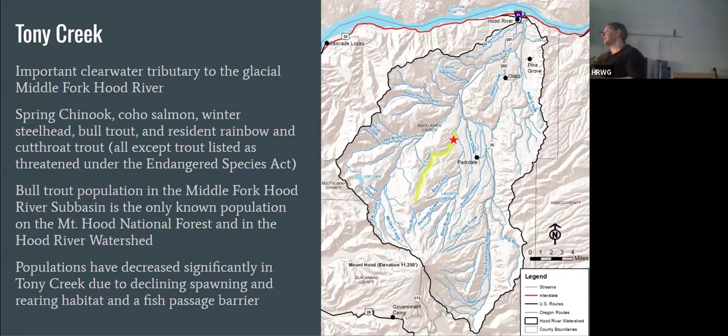But the two biggest are the impacts of logging in the watershed and a couple of fish passage barriers. So I wanted to show you this picture. Does anybody know where this is? This is, if you were coming down the highway to the north, this here is the flat. Generally, this area above here is where the Middle and East Fork confluence is. This is generally referred to as the East Fork until it hits the confluence of the West Fork down below. This is the dam here. This was the Oregon Lumber Company land. This dam here was in place for about 41 years.

It was a pretty major fish passage barrier during its lifespan to everything above on the Middle Fork and East Fork. A lot of the lumber that came through this mill largely came from the West Fork watershed, but because of the railroad that ran very close to Tony Creek, the vast majority of Tony Creek was logged and brought through this mill. So there's a long history of impact from logging on Tony Creek that had erosion consequences. There was historically a large amount of large wood naturally forming in the watershed that created a lot of great habitat, but a lot of that had since come through in the logging operations and had a pretty significant impact on the fish species there.

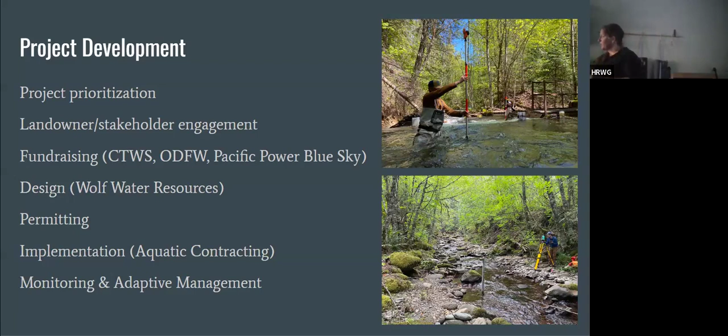We hired Steve and Liz with Wolf Water Resources to help us develop the design and the engineering for the project. There's an enormous, really fun amount of permitting we go through for these projects. And then we hire a contractor to implement Steve's design. And then we go into sort of a monitoring and adaptive management phase to make sure that the work we do is doing what we wanted it to do, and we adapt if we need to.

So this is our existing site. Steve's gonna walk you through the exciting technical stuff.

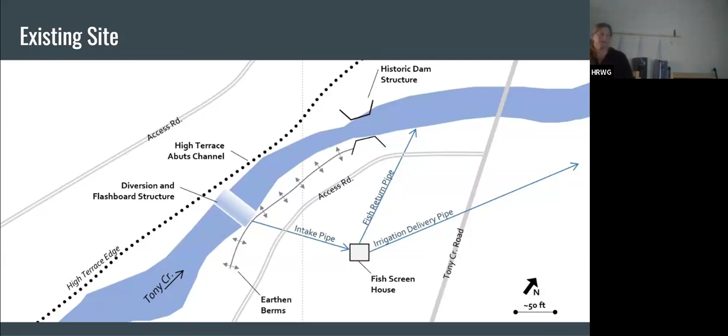Hi everybody, Steve, the design engineer. Just before I dive into this, I really want to acknowledge thanks to the Hood River Watershed Group, Alex, especially Cindy, and then also some of my colleagues that helped do this design - did a lot of the heavy lifting, like Liz, who's in the audience, but some others at my office, like Lucas Evans, as well as Curtis Loeb.

Anyways, this was a really interesting project. Just a little background - this is the existing site. You can see Tony Creek running from left to right here, and you have that dam, as well as downstream you have some historic features, like a historic dam, as well as Tony Creek Road, which really locks in the site. And then you have a very high terrace on the left. I don't know who's familiar with the site, but before construction it was also locked in by another big earthen berm on the right-hand side as well, and then a lot of diversion infrastructure in the floodplain to the sides.

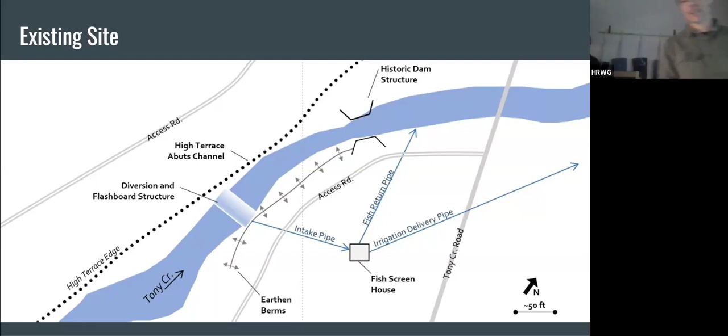And to kind of get a sense of what some of that looked like - obviously the diversion, the intake as well, the infrastructure in the floodplain, the bridge downstream, and some of the old concrete remnants in the floodplain.

So it's full of constraints. The site had a lot. The biggest one, obviously, was the diversion structure itself. And from the start, the direction was we couldn't touch it, essentially. We couldn't do anything that our project could extend into its footprint. We couldn't affect its operations or anything like that.

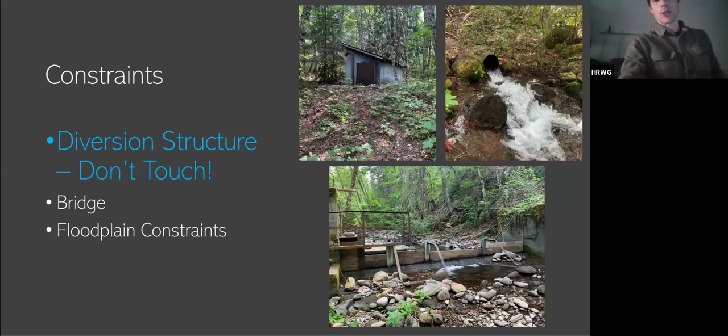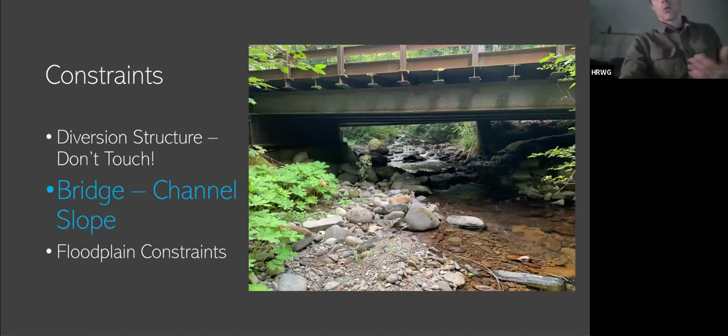And then the bridge downstream - it was only about 300 feet from the bridge to the diversion structure, so it's a very short reach. And within that, we couldn't really affect the profile of the stream itself. And there's not a lot of room in the floodplain because it has a high terrace on the left, it's got infrastructure on the right. So we couldn't change the alignment of it, lengthen it in any way. So we're really locked into this site - it's really constrained.

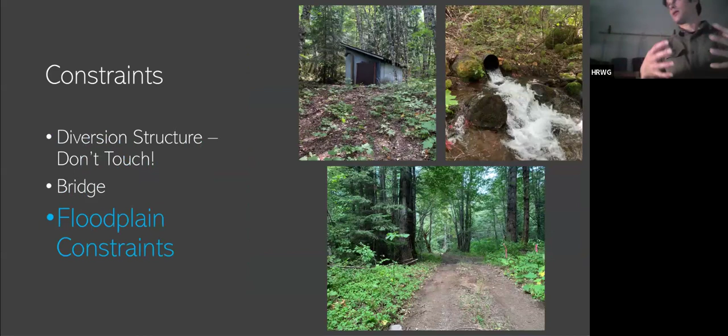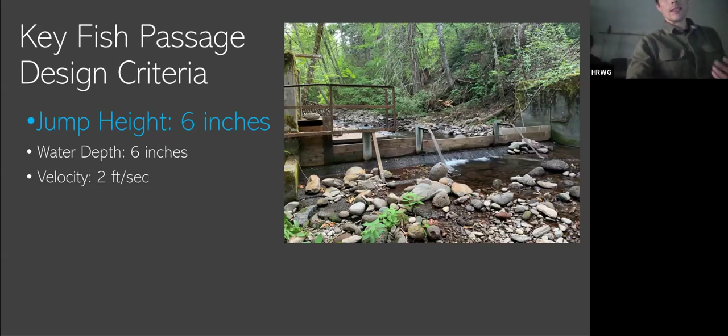With our design objectives, we have to design a project that meets fish passage criteria. Some of the basics are we have to achieve jump heights for fish, and maintain water depths at various flows. As flows get really low, especially when they divert more than half the base flows, we're left with only about 1 CFS in the channel itself. Additionally at high flows, we need to lower the velocities. It's a really steep reach, really narrow, coming with a lot of energy, and the narrower and steeper it is, the faster the velocity. We need to slow that down somehow and let fish get up the stream.

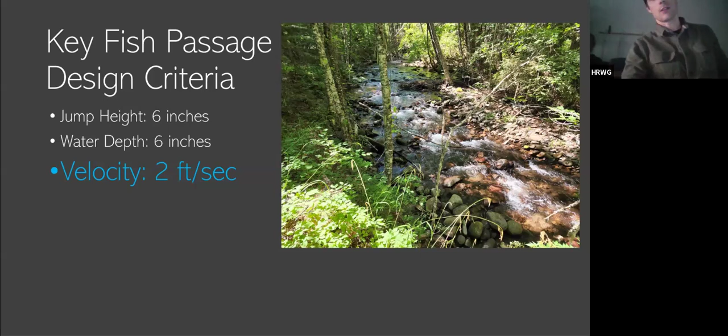Since we're running short on time, I'm going to skip slides that have numbers in them, since you're probably not interested. But basically, with the fish passage...

We also have design flows essentially. It's between a certain range of flows, basically above flows that happen more than 95% of the year. So 95% of 365 days of the year, flows above that we need to maintain fish passage, but then also 5% on the upper range. So there's a wide range of flows we're trying to meet.

Also with the diversion structure, when we start getting into design, it's like, what are we trying to do? We're trying to get fish past this structure here. And as you can see, they can't really make it.

This is in a low flow condition, and flow is actually going under those boards. To get a sense, they've got to get over that somehow - they can't really get through the little slot in between. For your reference, if you haven't been out there, that's about a 2.5 to 3 foot jump, and the little fish can't do it.

And we're trying to meet a 6-inch criteria. So we've got a lot of ground to make up. So how are we going to do that?

Essentially, this is what it's looking like. There's a big board in the way and flow going under it, and fish can't jump over that. Somehow, either you can go around it or maybe you can go over it. And this is kind of what we're trying to achieve.

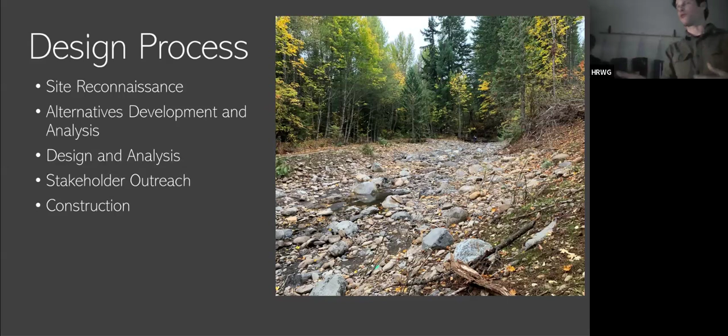I got to participate in a handful of those opportunities, but I know there was a lot going on in the background all throughout, before we even got involved and all through when we were there. And it's a very important part of these projects.

But then we developed some alternatives. The first two, like a roughened channel and cascade pool, very similar, basically the same. Cascade pool is just a little steeper and includes some resting pools in there. A step pool, that's basically just a series of steps that don't exceed that maximum jump height, essentially, to make the grade up. And then a side channel, that's literally going around the diversion. But since that would then require taking flow away from the diversion, that affects its operations, or would be perceived to, so that was kind of ruled out.

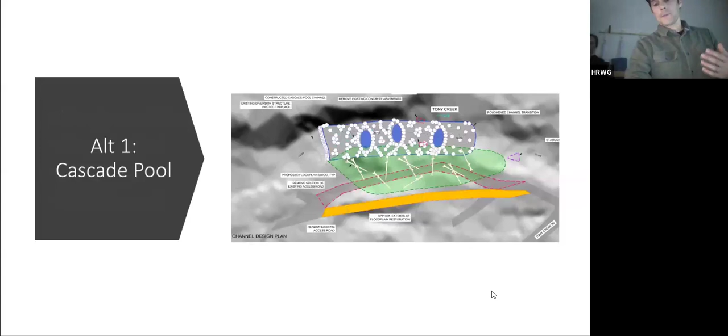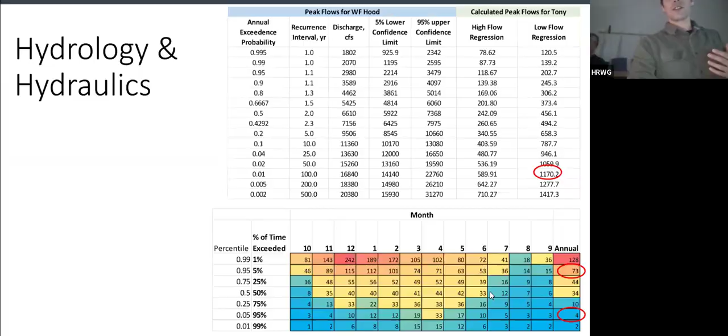And some of the simple graphics of those, like a cascade pool, I didn't change the slides, so we're going to skip through them. But basically, the preferred alternative was that cascade pool morphology, and the reasons why: one, it provided that fish passage, and two, for the conditions of the site, the slope and stuff, it was actually something that you could expect to see in a natural environment. And three, it's deformable, so to speak, as it can withstand some change.

The beds change over time in streams, and so you can expect to see rocks move around a little bit, but it still functions with a little bit of modification, as opposed to something that's very rigid in its design, like a step pool that requires specific geometries, that if a rock comes out of place, you might not achieve the fish passage criteria, and then it can't handle that change. So those were some of the reasons.

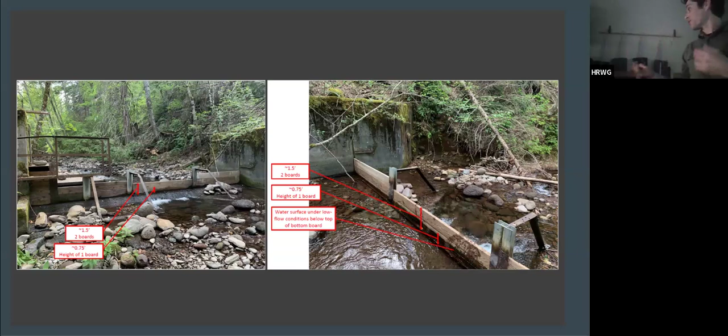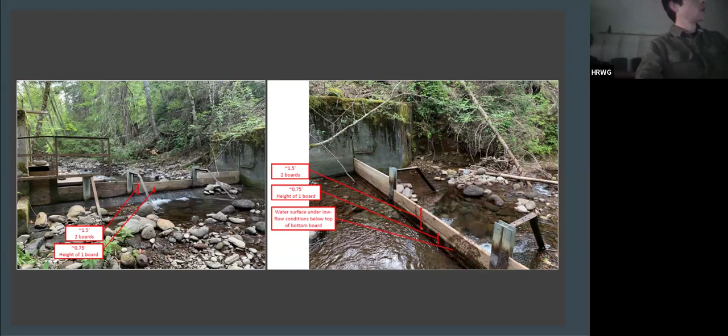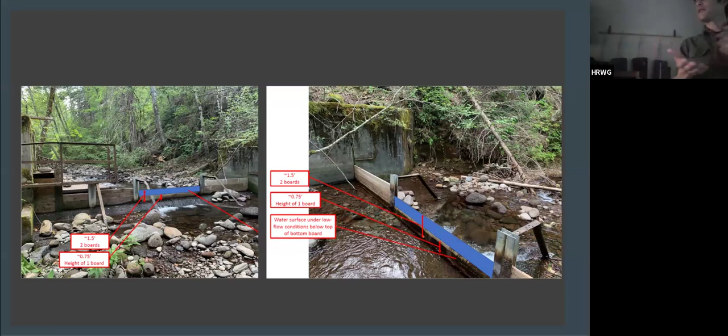And we had to show to ODFW that we couldn't meet all the requirements. But once we were able to show them that, we were able to bring it down a little bit and meet somewhere in the middle and come up with something where we could get it close. And then maybe we could work with the diversion owner and ideally come up with a scenario where they don't really need that board on top and say, can we lower that board? And so through discussions that Alix was having with the diversion owner, we kind of met in the middle, we brought the creek up, and they were open to bringing the boards down. And then we were able to meet the jump heights. So that was one key component of the design.

Another key component was the channel design itself. Because once we come up with, all right, we need to bring the channel up this high, now we've got to design this channel that's going to handle all this flow and not wash out like the existing channel has already. So we need it to be resilient to peak flows. We need it to, to the greatest extent possible, minimize that stream power, because the existing conditions were super narrow coming out of this creek.

So it was basically like a fire hose and it washed out all the bed material. And natural creeks tend to replenish themselves, but there's too much energy washing all the bed material out, and the dam itself was actually retaining all the sediment coming from upstream. So it was just getting washed down to this hard pan, this very clay layer. And so none of the rock was sticking around.

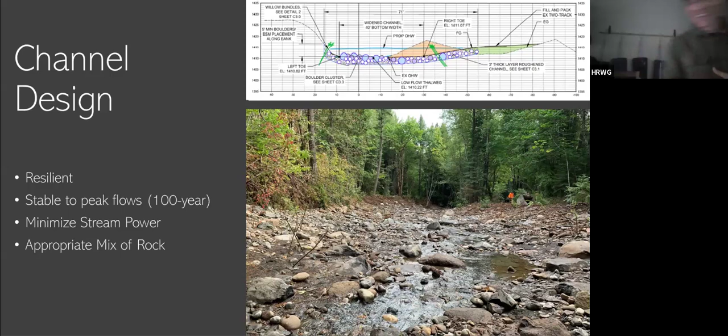So with that, we made a decision that the bed needs to be very resilient. And we're designing, putting oversized rock so that it can withstand flows up to the 100-year event. We don't want it to go away. And with that, I'm not going to show you many equations, okay?

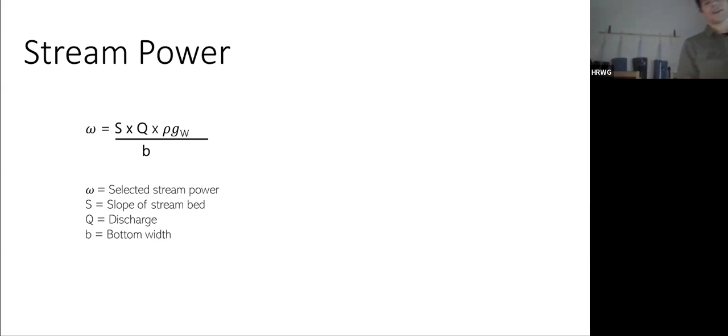But good point. So basically, we can measure with some hydraulic variables the power of the creek to erode the stream bed. And rather than look at the equation itself, look at the specific variables. The things that go into it are the channel slope, which we don't really have much control of because we're so confined. And if anything, we're raising it to kind of meet the diversion.

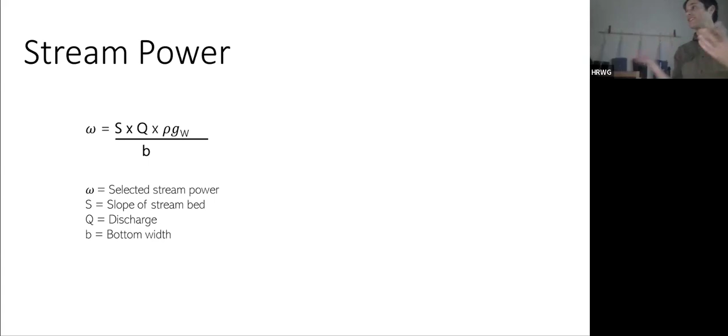The discharge of the creek, or the flow. We're not Mother Nature. She's dictating this. But then also the one on the bottom is the channel width. And that is actually something we can do something about. And for all you math whizzes out there, it's the denominator. So if we widen it, we make it bigger, it actually reduces the stream power.

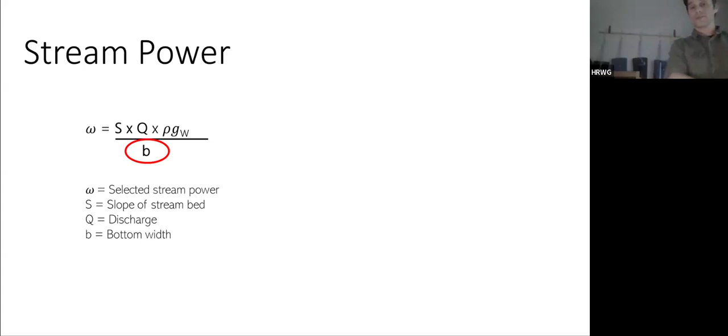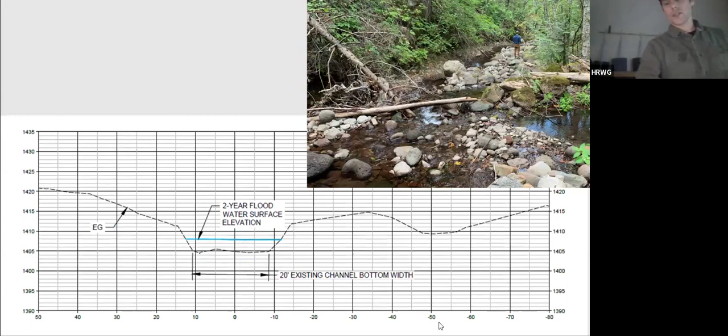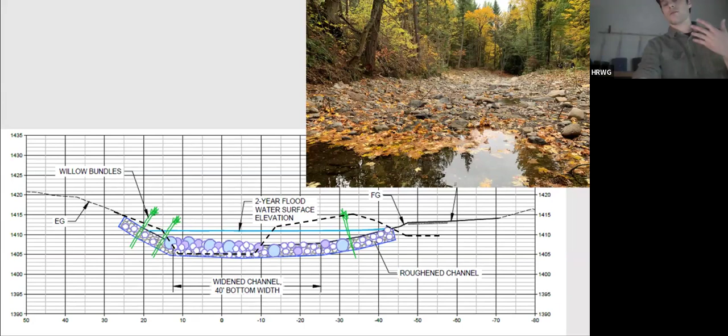So like I was saying before, on the right-hand side, there's this big mound that's confining the channel, and it's leaving just this 20-foot channel under pre-project conditions. Well, what if we remove that and we widen this channel? And so that was our plan. We could essentially double the width of this channel and greatly reduce the power of this creek and increase the likelihood that what we put in there is going to stick around, reduce the forces that are acting on our proposed channel. And so that's what our design intended to do, and ended up with something like this instead.

And what's that? Not so much. I don't know if we see much spawning. It's more just reducing the amount of power in here, because the fish definitely need spawning habitat. That's upstream, because we want them to get there. But before this project, they couldn't swim through this because it was just a fire hose. It would just flush them right out. Or not enough water.

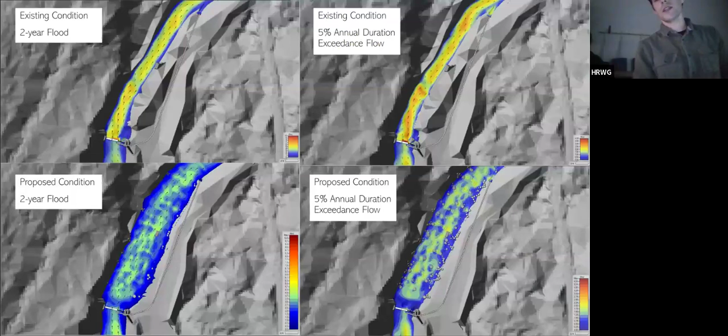And to kind of see it, and this is where I get excited, this is the model and the output. Don't look too closely, but see the colors more or less. On the top two are existing conditions, and on the bottom are post-project conditions, and a couple different design flows that we did. You see a lot more of the reds and yellows and oranges, as those are the higher velocities and higher powers.

Not to mention on the top, it's a much narrower stream of water that's running down. But then on the bottom, it's a lot more cooler colors, the blues and the lighter blues. And that means we've really reduced the velocities. And as you can see, we've made it a much wider wetted channel and just spread the water out, spread the energy out.

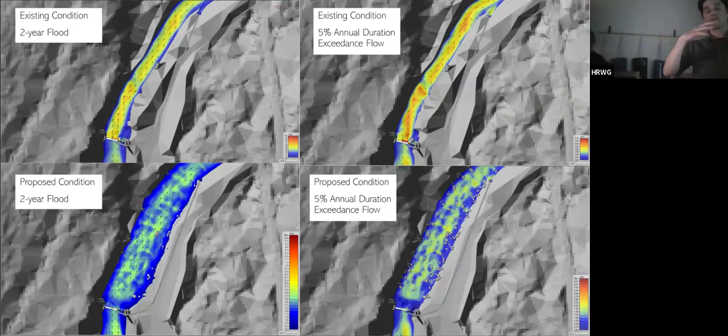And especially on the right, that's a lower flow, but you can see these little circles in there. Those are large boulders that we also are incorporating that are above the water surface and create shadows and slow water areas, basically creating those slow water paths that can get up to the dam and then cross over.

And so that's what went into the design, and finally we put all the detail into it so that a contractor could bid on it and build it. I tried to keep it short. So, right? Gotta help me walk through this part too. So I guess I could lead into that.

So after we did all that, we put together basically design drawings. We put the details together on how to construct what we were trying to achieve: how you build a channel, how you put all the rocks in, the step-by-step process of constructing the channel, like over-excavating, to the dimensions and the elevations that we needed in order to achieve that objective. Yeah, and then they went out and built it this summer.

You can see these projects are really engineered, which is what we have to do in some of these stream reaches, like Baldwin Creek, where there's infrastructure, where there's FEMA floodplain mapping, so that we can get these projects permitted and put them in the ground.

So the enormous amount of work that goes into the design and engineering is clearly a critical part of this project, or these projects. But we're just gonna show you a lot of pretty pictures of the process of the construction. This is before, so this is looking up at the dam, and then this is pretty much at the bottom of the reach looking up. And this is clearly at low flow, so you can imagine.

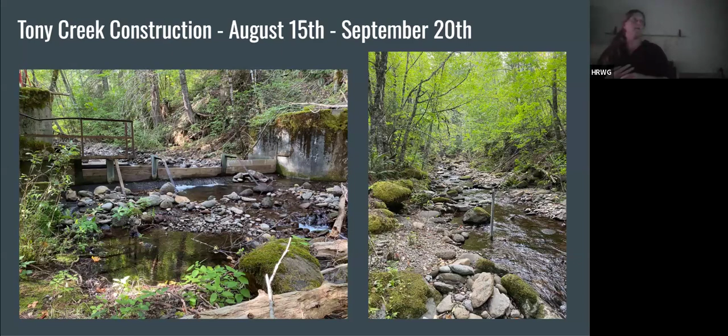So we constructed this project between August 15th and September 20th last year, so a decent amount of time. We hired Aquatic Contracting to do this project. Let's see. They're amazing, yeah, amazing contractor.

Challenge with construction is it's a very unique situation. There's a lot of on the water. You're always dealing with water. There's a lot of sensitive habitats, and just a qualified contractor that's done this work before and knows what they're doing just makes a world of difference in project success. And they were really wonderful

The first thing we do, particularly in this reach, we were able to divert the entire project reach through to the diversion to maintain downstream passage for fish that were in the creek. So then we basically dewatered the entire 300 reach that we were constructing. And then ODFW comes in, and some key volunteers like Alexis, the new FID manager. And we salvage all the fish and other aquatic wildlife species that are in that reach before we construct.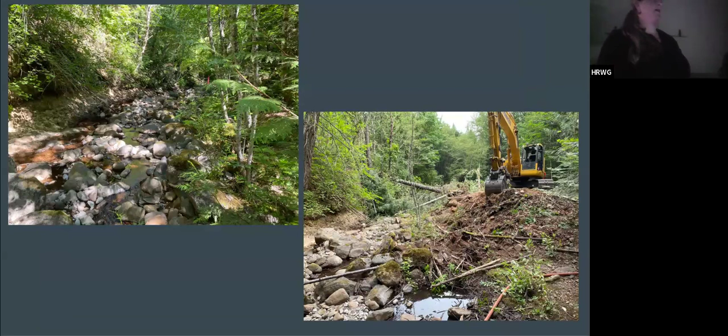This is this berm that Steve has been talking about. You can see the creek is on the other side here, but it was a man-made feature on the landscape that really confined the reach. And so one of the first things we did was take that out with a big excavator. A lot of that soil that was on site we used to raise the road, the access road.

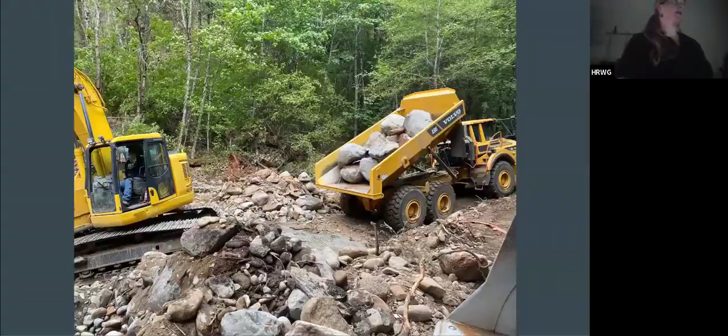And this is sort of in process. You can see how much big rock material was in there. We were able to reuse that all in the construction of the creek itself. You can see how it's changing. We brought in upwards of 1,700 tons of rock in a range of sizes. These very big 4 to 6 foot boulders, some even bigger.

A mix that we had created for us, an engineered stream bed mix that had a varied amount of cobbles and small boulders, and Steve put a lot of time into creating the exact specifications for that mix. And then we had a whole bunch of sand, and we'll get to that in a minute. This is Steve's schematic of what it should look like when it's constructed.

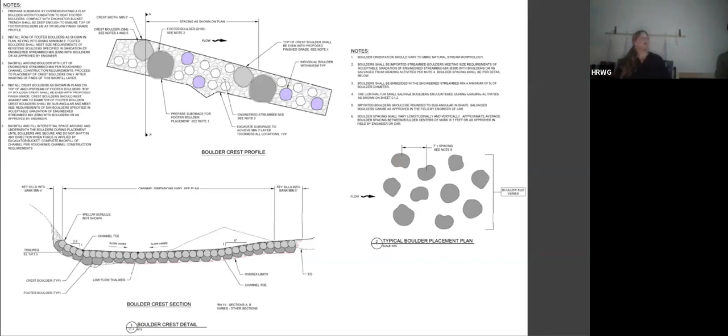Yeah, so I mixed in a couple plan set details in here because we have constructed photos. So basically we had to develop these construction details, how to build different features. Some of the elements we did were the grade controls or boulder crests that kind of set those grades, and then the actual step-by-step sequencing of building the channel, and then also create the resting pools in that cascade pool formation by putting in these big boulder clusters that would basically create small backwater areas and pool areas within the channel, and then it would meander through.

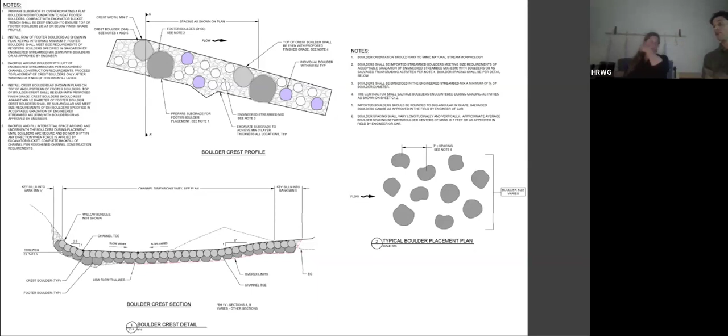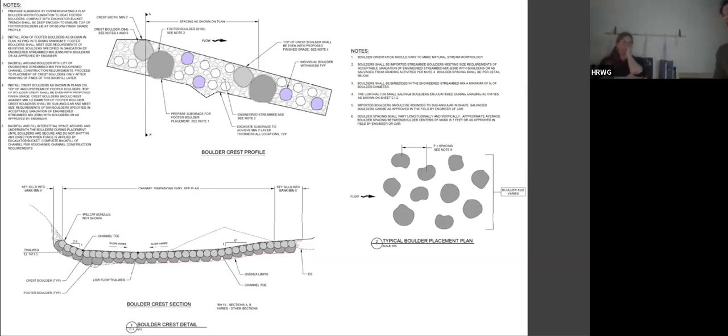So to get a sense, and this also emphasizes how important it is to have a good contractor, they need to be able to look at these cartoon drawings that Liz and I developed. Yeah, you're not off the hook. And then they need to interpret this and build it in the field. So when you look at something like this, it's actually looking like this in the field. And then after they backfill it, you're just like, wait, where did they go? But it's in there.

Yeah. And it's really in there to lock in that grade material. The grade is set down below the grade of the finished stream bed. So those 4 to 6 foot boulders, this big, as the contractor called it after a while, frowny face across the bed, because he loved it so much. That's underneath the bed, and then they're filled in with all this other mixture of rock. Like the foundation. It's the foundation. Yeah. And there were 4 of those throughout the 300 feet.

And they sort of set the grade, and they're pretty bombproof, so that if there's shifting in the creek over time, which we expect there might be, that really holds the grade so that the creek isn't going to head cut up and take out the very precisely constructed stream bed.

Was there any bedrock at all? In one challenging section, you saw in this picture here, we were constantly checking grade and making sure that those rocks were placed right where Steve wanted them, so that we could conform to the design. But just downstream from this spot, we hit some pretty hard pan rock, and what we ended up doing is chipping it out with the excavator.

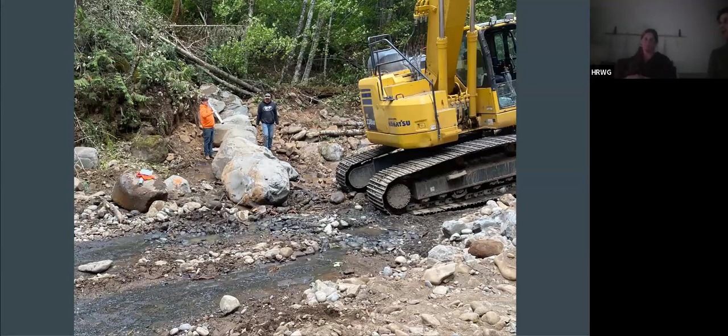So we hit that point. Yeah, it wasn't quite bedrock. It was more like a really hardened clay. So yeah, they were able to chip it out. There are always exciting unforeseen challenges as you're constructing. In order to build this channel, it's not just dig a hole and then put it in. It's a series of steps to make sure it goes in well and comes together solidly in a form that won't just unravel.

So you have to over excavate it. Then you have to start putting stuff in the margins, and then you're going to put a bunch of boulders in, and because the site's so small and the material is so big, you can't just bring in a rolling compaction like you would when designing a road. You have to put it together meticulously and wash things in. So you put in boulders, backfill with the rest of the mix, and do that in a series of lifts so that you get everything washed in and bring in the fines.

So with large rock, when you put it all together, you've seen squirrels go crawling into those voids. There's a lot of open space even within that mix. You can't have that. If that's left there, it's much more likely to just unravel when the river hits it. So you have to fill all of that in. And that's where you're literally with a hose and buckets of sand, washing it in. So you put in a lot of boulders, and then you put in more rock.

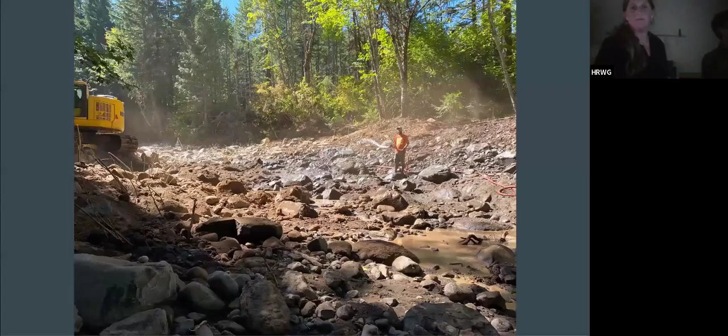And Alex and Eric, I took a turn on it. You're just holding the hose. We spent many hours just washing the fines, taking basically a fire hose and washing in, and it's actually really therapeutic. Yeah, it is. Really addicted to it. When they wouldn't let me do it, I was actually a little shaky. You just wash those fines in to fill in those voids and to seal the bed. And if the water just infiltrated, I'd be like, you haven't done enough, keep doing more. So basically, it has to retain standing water.

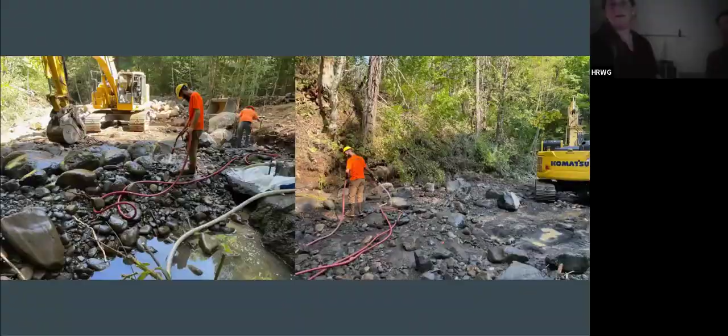And going back to how much flow we have, when you're only left with maybe a single CFS in the creek at low flows, it's really important to make sure that water stays on the surface. And the little bit of water that was coming through the subsurface, we just pumped that back in and used it for this washing in.

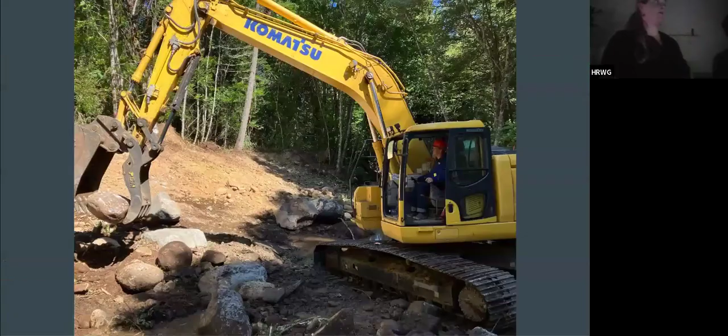You can see what it looks like once you get all of the sand. The excavator would sprinkle the sand over the top, and we'd wash it in, then sprinkle the sand over the top and wash it in, and then do another level. So lots of hose moving around the site. I did want to point out that I got to place that rock in the excavator, that one rock.

Well, I didn't get... You didn't have to sign off on that one. You do that. Yeah, so this is just working down.

You can see the over-excavation below, before you start placing the rocks.

Another really important part is that Chuck and another volunteer harvested about 500 to 600 stakes, willow and dogwood stakes. Throughout the project, as we were constructing, the excavator would come in, stick the tines of the bucket in and pull back, and we'd shove a bunch of these stakes in. You can see that right off the bat we made sure they were hitting the water before we sealed it back up and washed it back in.

So as we went, we put a bunch of natural roughness in on the bank. We were just out there today, and they're looking really well.

This is sort of what it started to look like at the end. You can see our goal was to hit water level at the concrete sill of the dam, which it was doing. In the previous pictures you can see the concrete sill down here, up to the top of the sill.

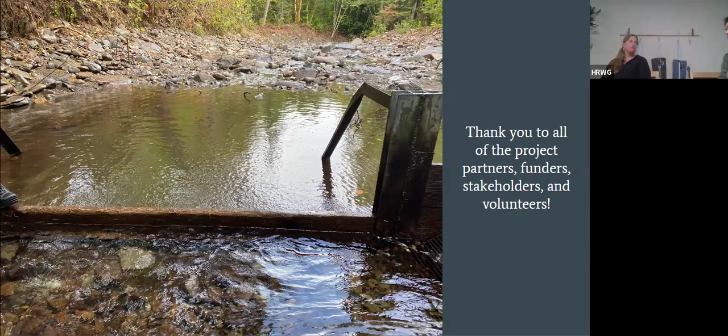But the range of those fish passage design flows was more like 4 CFS at the low end to 70 CFS at kind of your typical 5%. We did have some flow data from ODFW and the tribes, about 10 years worth, and that was definitely worked in. There's no peak data though, so more typical - we used those for the low flow statistics, and then did peak flow through regression.